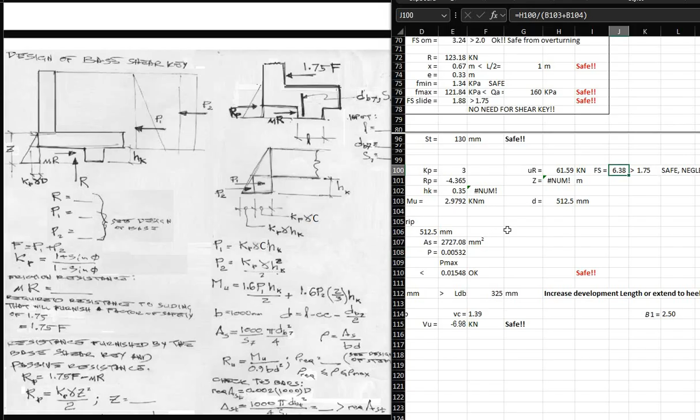Ngayon, yung shear key na yan, ay ang forces sa P1, P2 ng shear key would be this. Kaya, sosolvin muna natin yung P1, P2 sa shear key. Ngayon, yung P1 is equal to K sub P times unit weight times C times HK. Ito, sinundan lang natin tong equation na yan.

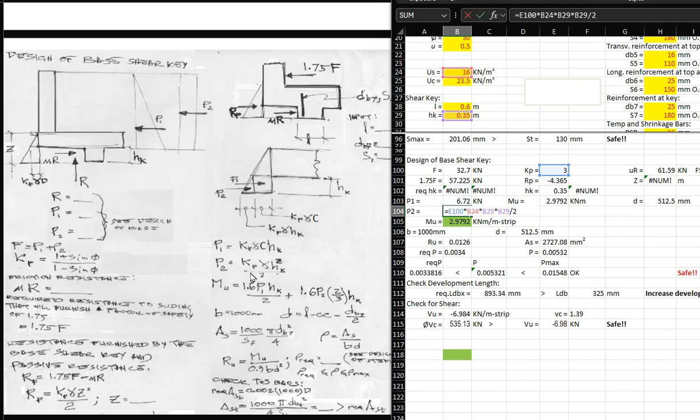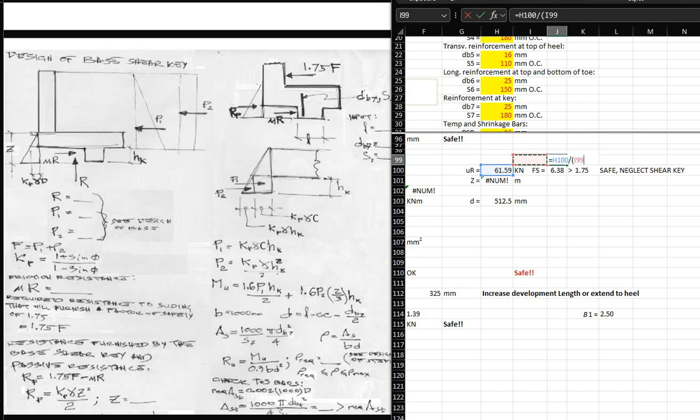And then, ang P2 naman, that is equal to KP times unit weight times HK squared divided by 2. Okay, and then we can now solve for the factor of safety for sliding. So again, this is equal to mu R divided by the sum of P1 and P2. So yan yung 6.38. It is obviously greater than 1.75.

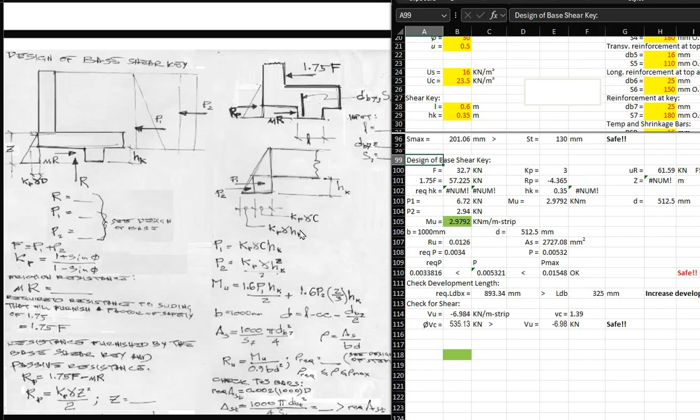Kaya, hindi natin talaga kailangan ng shear key. Anyway, for demonstration purposes, let us continue. Okay, next is kukunin natin ngayon yung passive resistance, R sub P.

Ngayon, yung R sub P is equal to 1.75 F minus mu R. And then, R sub P is equal to Kp unit weight Z squared divided by 2. Ngayon, yung Z na yan, it is the height of the soil para makapag-produce ng factor of safety na 1.75, if in case na talagang nag-fail tayo.

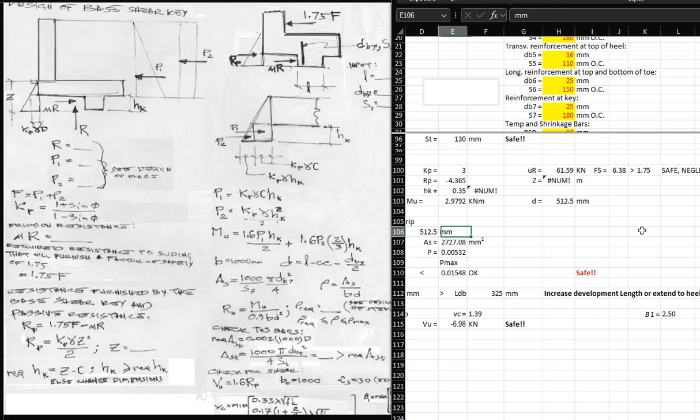So, ito yung equation ng Z. Of course, dito sa sample natin, talagang negative or invalid ang kanyang sagot kasi hindi naman talaga natin kailangan ng shear key. Anyway, just for demonstration, yan yung equation ng Z. Z is equal to the square root of 2 times RP divided by K sub P times unit weight, and then kunin mo yung square root niya. So, that is your Z.

So, from there, i-minus mo ito na yung Z, i-minus mo yung C, makukuha mo na yung required height nung shear key. Yan yung required height nung shear key. And then, i-compare mo ngayon yung input na shear key mo, which is 0.35. Ngayon, kapag yung required, itong actual shear key height is greater than the required height of shear key, then magko-comment siya ng okay.

Next is, ngayon naka-determine na tayo ng height ng shear key. Alam na natin yung forces P1 and P2. I-design na natin ngayon yung moment nung DB7. Tapos i-design din natin siya against shear.

Actually, ang dinesign pa lang natin dito, yung dimensions nung shear key, yung height nung shear key. Okay, so ang ating MU, ngayon magpupunta na tayo ng reinforced concrete design using SRB. Ang ating MU is 1.6 times this P1 times HK. Take note na area nitong triangular block ang sosolvin natin. And then yung P2 naman, area ng rectangular block for P1, and then for P2, area ng triangular block na yan.

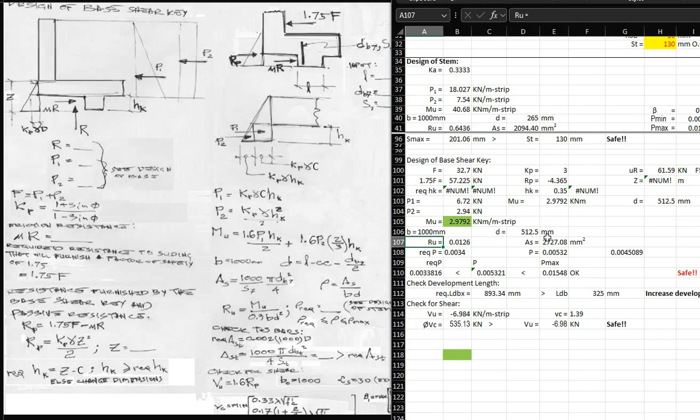Okay, so ang rho minimum natin ay 0.0034. So nag-govern si rho minimum. Next.

Okay, so ulitin ko lang. Ang required rho natin ay equal to 0.0034. Hindi yan 0.004. I-solve natin.

So this is MU times 1 million divided by 0.9 times 1,000 times D times D. Okay, ulitin ko lang muna itong RU. Medyo nakakalito talaga. So this is M sub U times 1 million divided by 0.9 times 1,000, that is meter strip, times D times D.

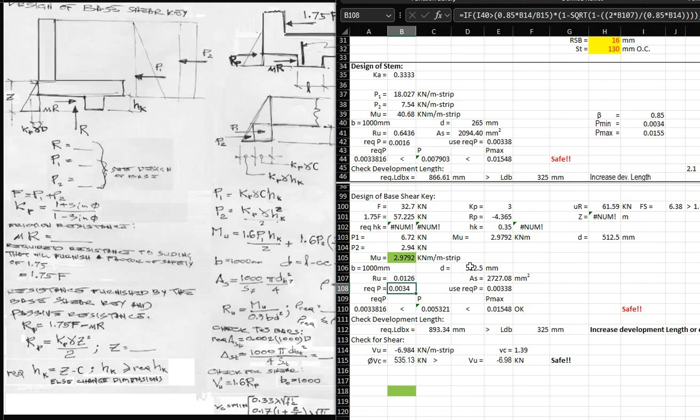Then close. Okay, next, kunin na natin si required rho. So si required rho is equal to 0.85 f prime c all over fy times 1 minus square root of 1 minus 2 ru divided by 0.85 f prime c. And obviously this is less than our rho minimum na 0.0034.

Kaya magre-recompute tayo. So we will use recomputed rho, which is the maximum of rho minimum and 4/3 of this required rho. So lumalabas na ang gagamitin natin na recomputed rho would be yung rho minimum na 0.0034. So yan ang ilalagay natin dito.

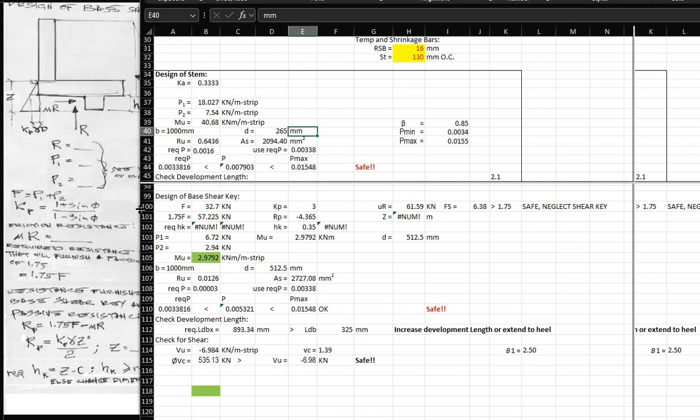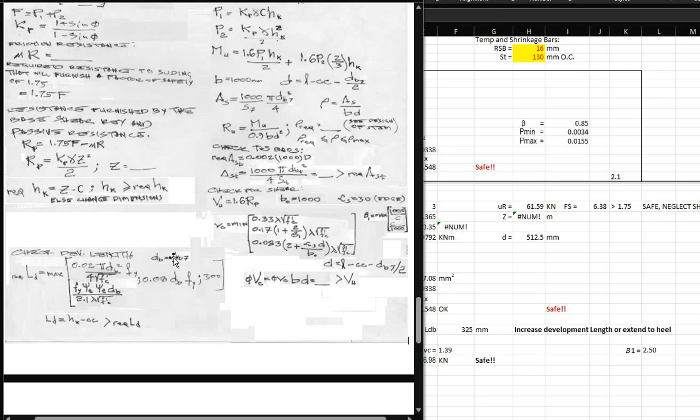And then we get to compare now our actual steel ratio na AS all over BD. Okay, so satisfied na yan. And then we now check the development length. So ang development length is same equation, ito pa rin, but this time ang gagamitin natin na diameter of bar is DB7.

Ito yun, reinforcement at key. Tapos ang actual development length niya is HK minus clear cover. Okay, so ito si required development length. Ito si HK, ito minus clear cover.

As you can see, naka-link siya dito sa HK minus clear cover. So i-extend natin kasi nag-fail siya, no? So how do we extend? Ito ngayon yung key, ito yung DB7. I-extend mo yan, magle-letter L siya dun pababa.

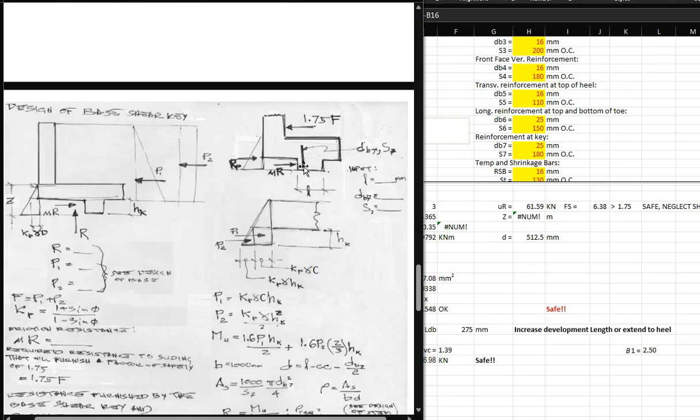Okay, kasi ang height ng key ay 350. Okay, so doon ka mag-extend pababa.

And then lastly, dito na tayo ngayon sa check for shear. Okay, ang ating shear force dito ay mag-o-occur dito sa along the length of shear key L dyan. Yung connection between the footing and the shear key, dyan mag-o-occur yung shear.

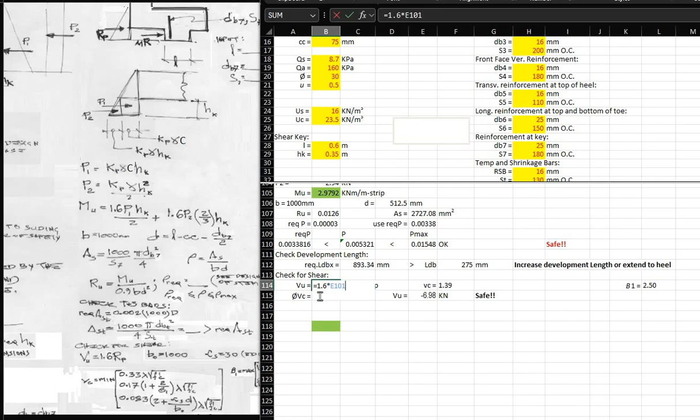So ang shear force natin VU is equal to 1.6 times R sub P. Okay, next, ang ating VC ay minimum of these three conditions, pero kailangan nating i-solve si beta 1. Ito si beta 1, beta 1 by the way is 1,000 all over C, and the maximum of C all over 1,000. Naka-connect siya sa B11.

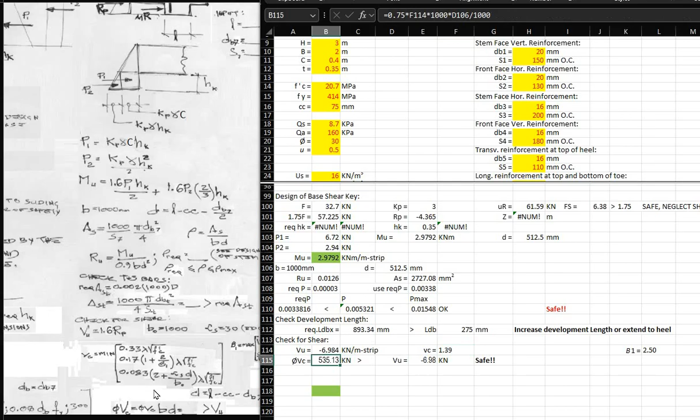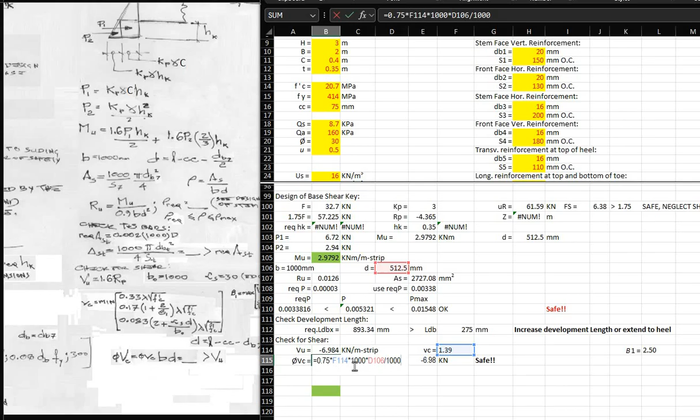Okay, next, so we now compute your allowable shear stress VC. After which, dyan magde-depend itong allowable shear force phi VC, which is equal to 0.75 times VC times 1,000 times D divided by 1,000 para maging kilonewton. And then you compare that with VU.